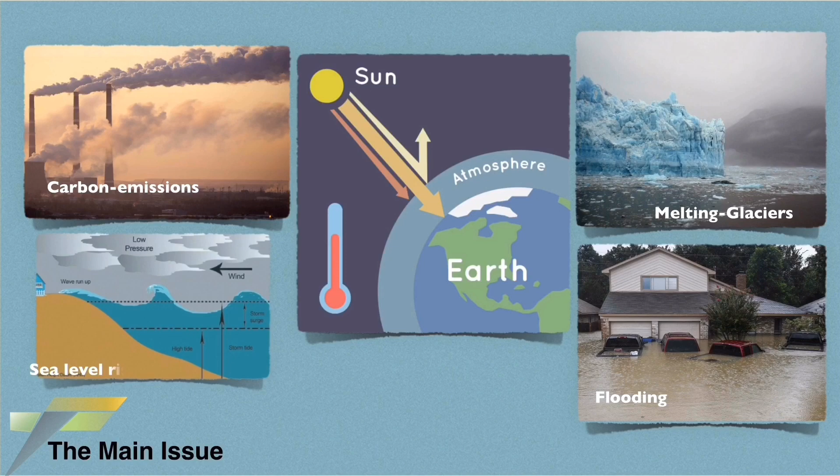Today, a challenge facing the world is happening much faster than ever before due to increasing carbon emissions and rising global average temperature, leading to melting glaciers, more flooding and rising water level. By 2050, the most low-lying coastal cities will face a projected sea level rise by at least half a meter. This puts millions of people at risk from impacts of rising seas.

These challenges have forced architecture to shift from land into water, creating a sustainable future vision by improving floating building systems. The following presents the main principles for constructing a floating building: mega float pontoon type floating.

A huge plate placed on the sea level. The pontoon uses concrete composite with expanded polystyrene lightweight material. The access bridge, the chain mooring piles for more stability and fixed due to fluctuation of the water level, mooring facility to maintain the floating structure in place. The breakwater for mitigating wave forces affecting the floating structure.

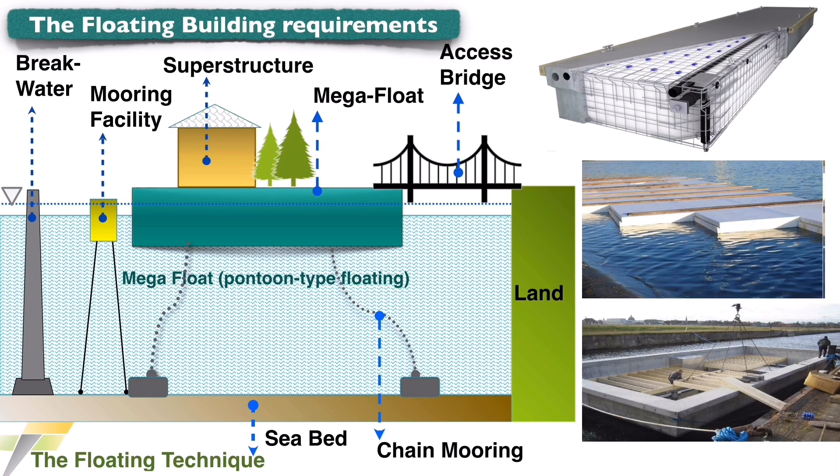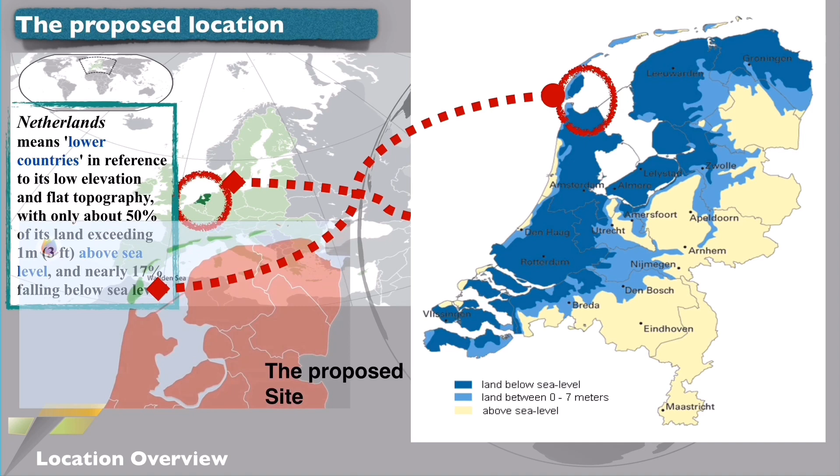The proposed location for building a floating resort is Netherlands. Netherlands is located in northwest Europe, along the North Sea. Netherlands in Dutch literally means the low country. Most of the land is reclaimed and coastal lowland.

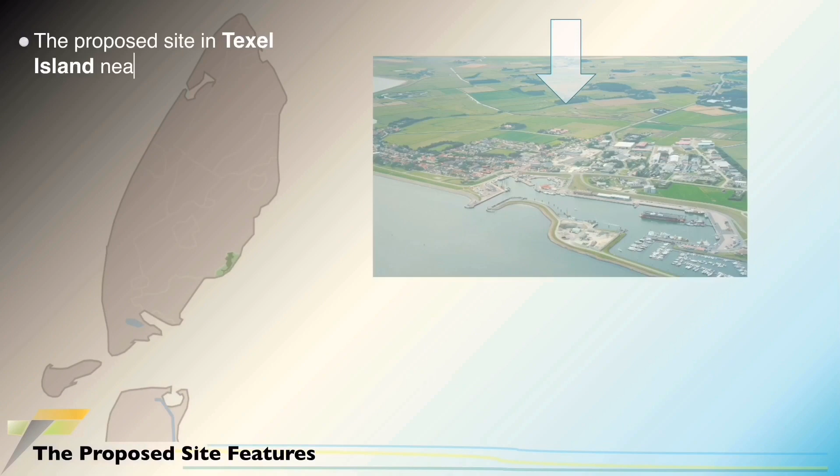The Texel Island, which is the selected site of the floating resort, is one of the largest island groups along the Wadden Sea Islands in the north of the Netherlands. It's located in the north-northwest of the Netherlands, about 12 km north of Den Helder, along Oudeschild town. The proposed site is connected to the main roads and neighborhood facilities in Oudeschild town.

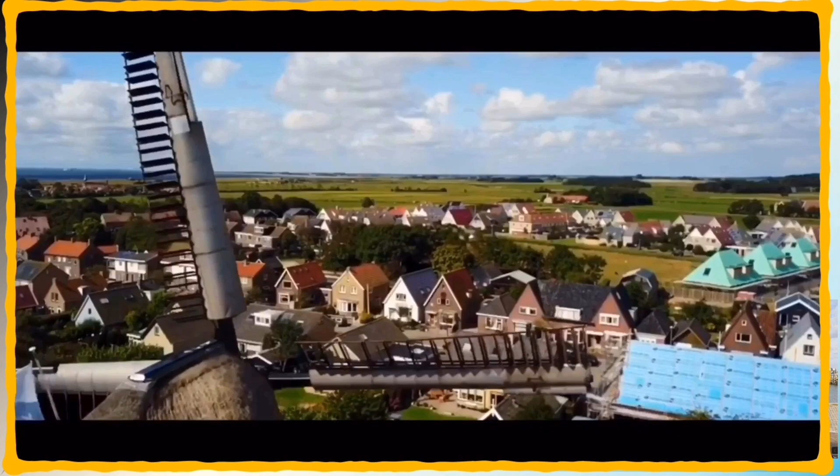Texel Island has an extensive network of cycle paths. It's common for seals, sandy beach, dunes, and grass-topped areas, near to the fishing harbor. Texel Island has a wealth of natural and cultural landscape.

The weather conditions of Texel Island are most impacted by the Wadden Sea and the North Sea surrounding it. The following analysis best describes the climatic conditions. The sun path will be from the northeast side of the building to the southwest, while the dominant blowing wind direction is from the southwest, a cold wind.

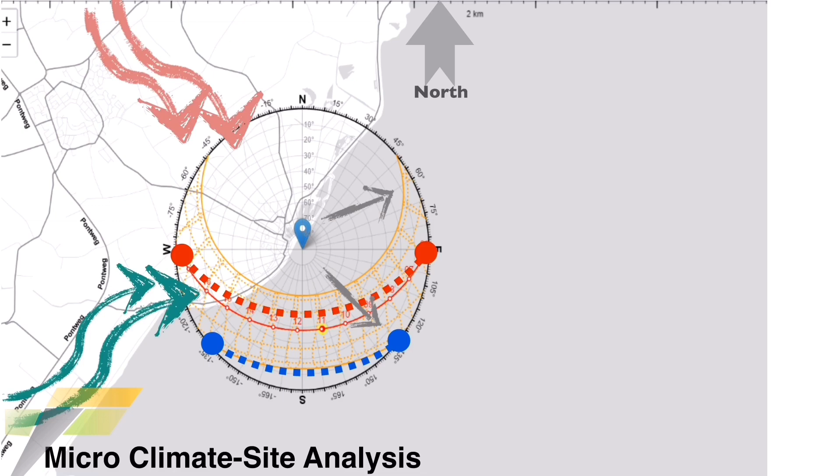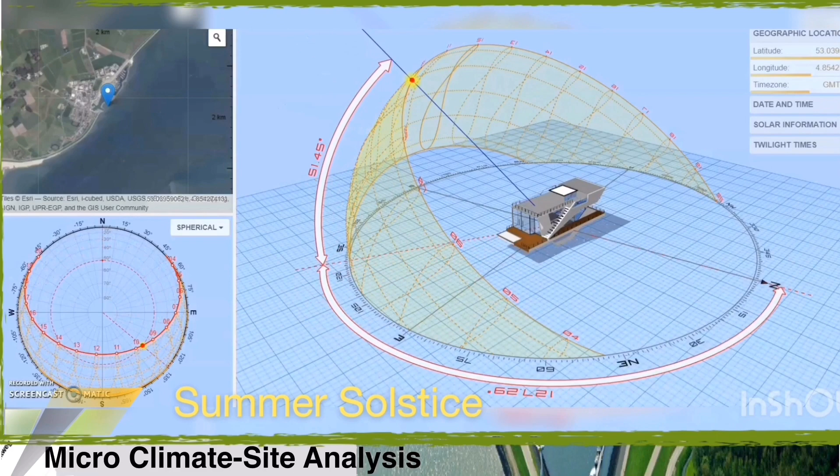The proposed site is an open location, exposed to the wind and tide, which can be beneficial for employing renewable energy sources. We can clearly notice the sun angle during summer and winter solstice. The sun path of the building runs between sunrise and sunset, with a very low solar radiation angle during winter solstice.

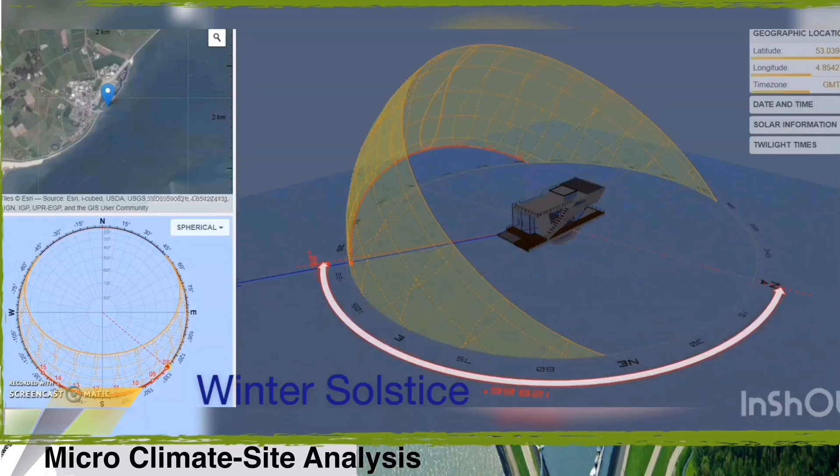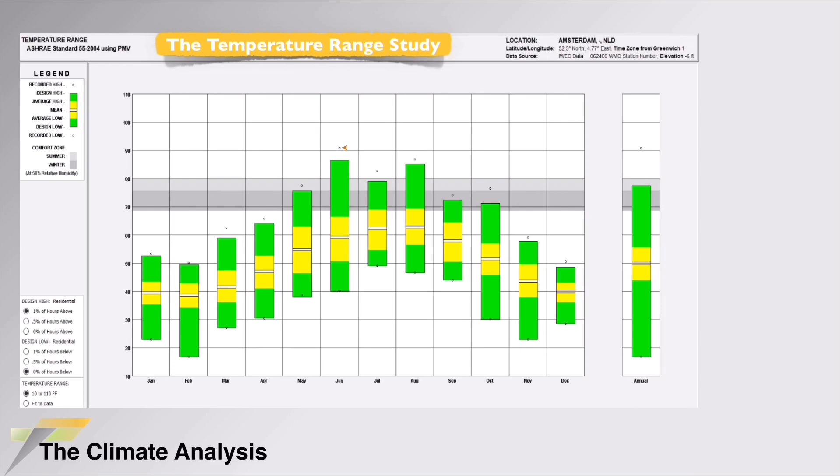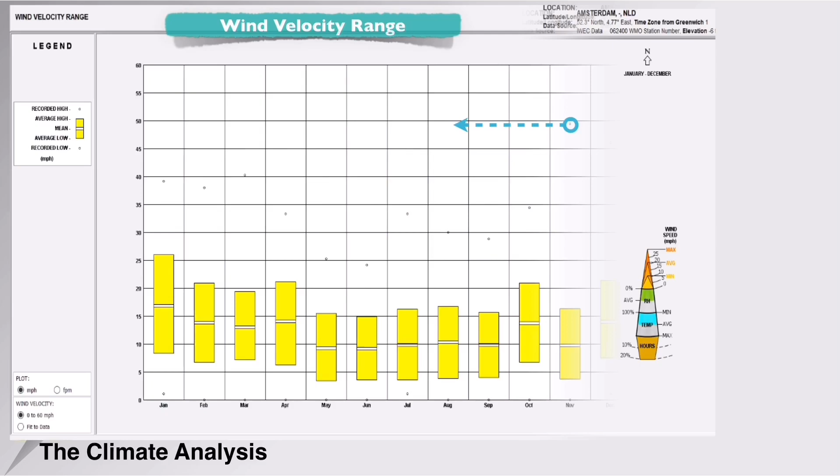The highest recorded temperature, in June, is about 88 degrees Fahrenheit, while the lowest temperature, in February, is about 18 degrees Fahrenheit. The most prevailing and strongest wind is from the southwest direction, with about 50 miles per hour recorded as the highest value in November.

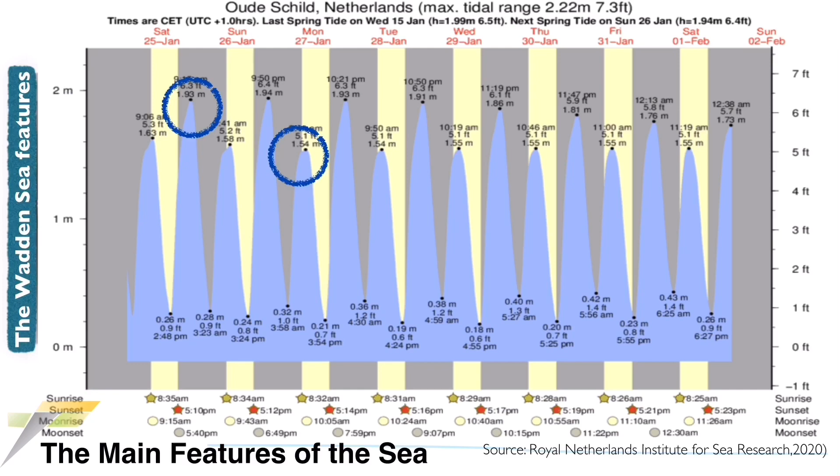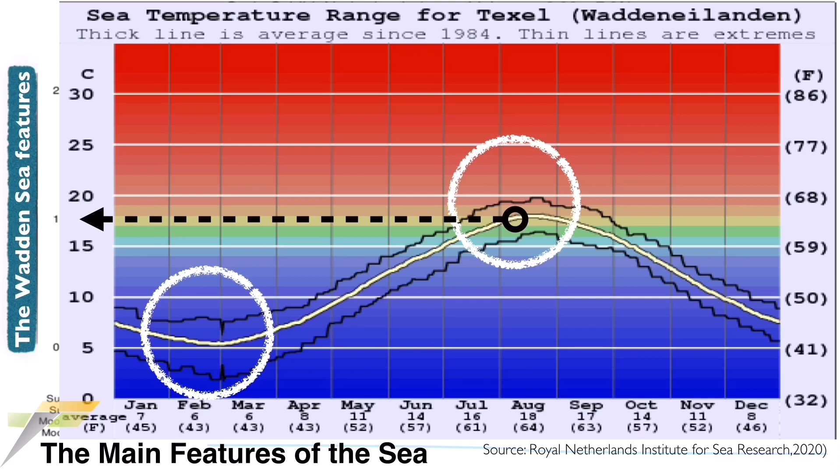Maximum tidal range is about 2.22 meters, while the lowest tide height is about 1.5 meters. The water temperature of the Wadden Sea peaks around 18 degrees Celsius in August, while the minimum temperature is about 2 degrees Celsius in February. The water depth along the coastal Wadden Sea is about 2 to 25 meters.

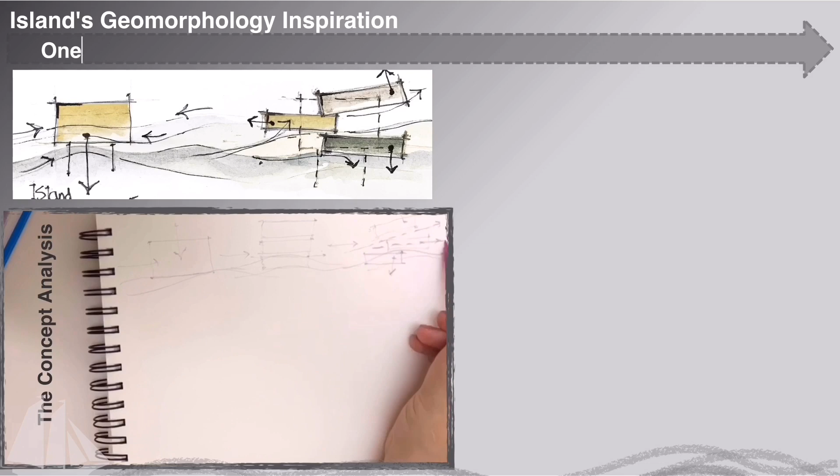Texel Island's geomorphology is an endless source of inspiration for me. The dune floating resort is not only sitting on the water, but it also responds to the surrounding environment.

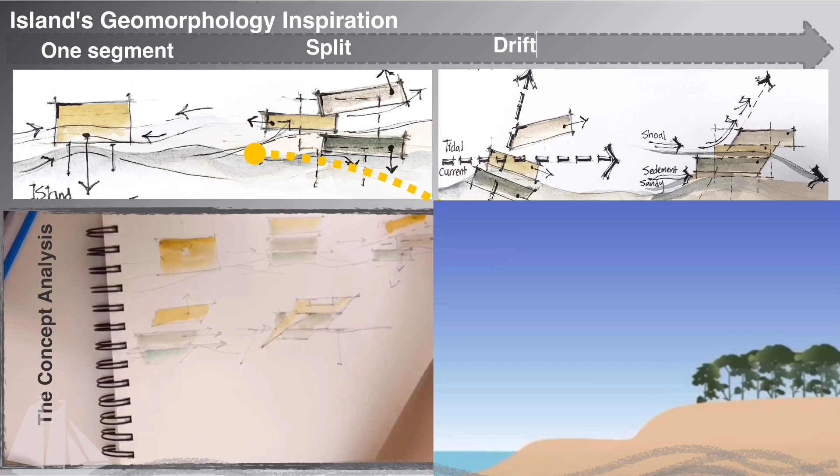Divided into 4 stages: the island segment is exposed to natural power sources, resulting in losing its stability, then splitting into 3 different layers. A drift grows in displacement as the tidal current rises, and finally dune sediment accumulation creates the final form.

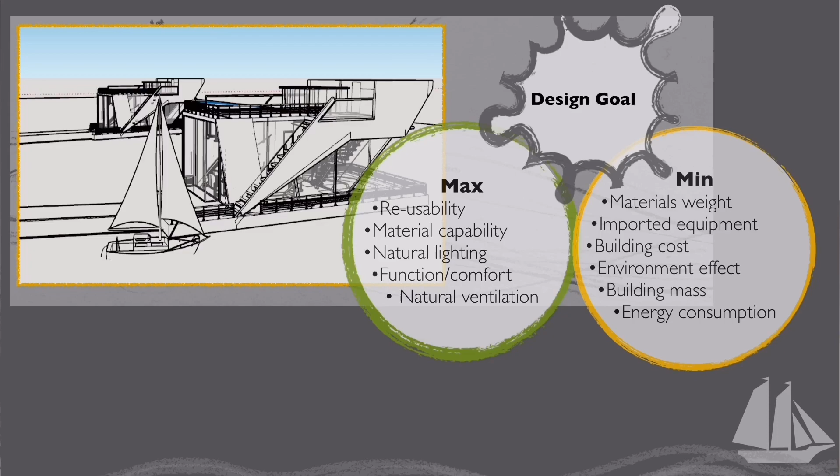The design of the project attempted to achieve these goals. The floating building includes 3 different levels: the ground floor, the first floor, and the observation room underwater. There is a variety of differential levels within the space.

This motivates the guest to explore more, as well as keeps flowing circulation by altering access from one zone to another. The ground floor includes the main spaces: lobby, living room, dining, and kitchen.

The living room is surrounded by a large glass wall connected with open space for enhancing visual daylight, and a mesh deck for relaxing. The swimming pool opens to a wide view of the sea. The first floor is elevated by a light stair to the bedrooms.

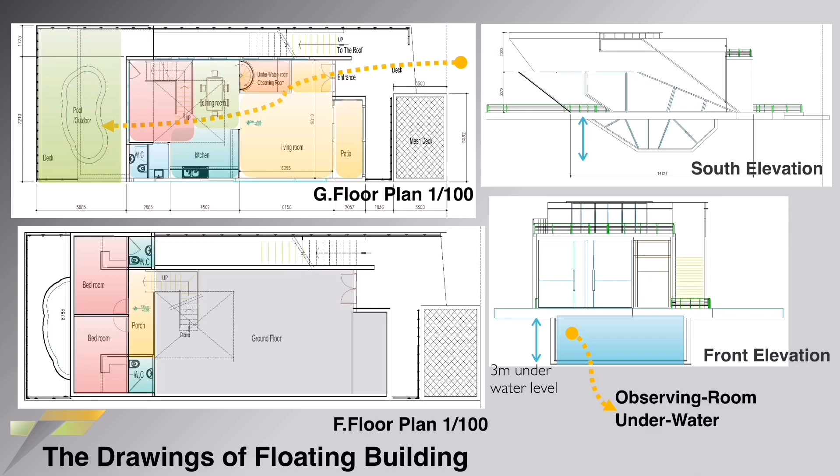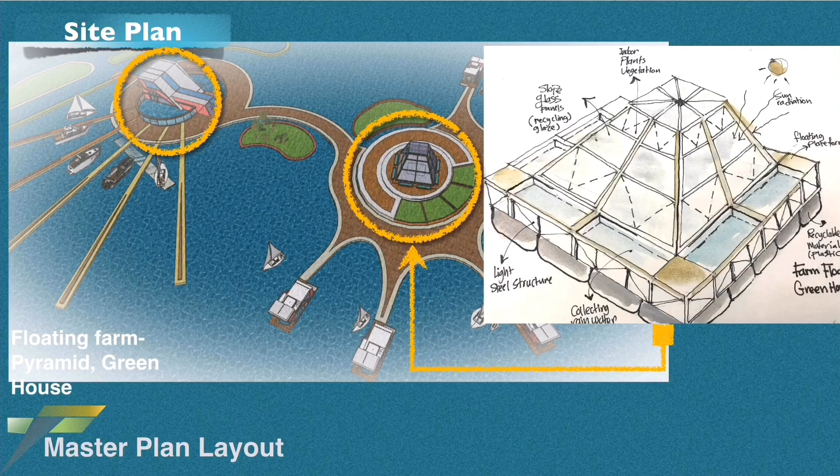As you step into the project of 6 units of floating buildings, you enter the main building, which represents the entrance of the project, gently stretching to the floating farm by a curved jetty, with 6 units distributed in a radial rounded form.

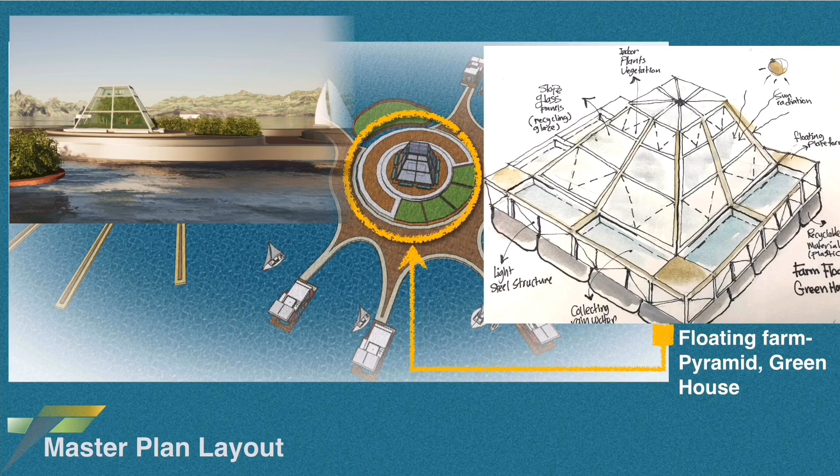The floating farm, filled with herbs and flowers, acts as a greenhouse, collecting the rain water through a glazing surface slope into basins.

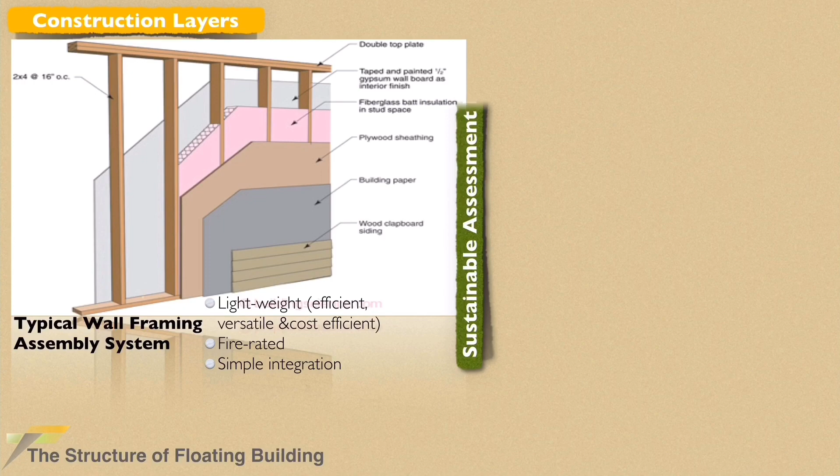The total weight of the structure and the environmental conditions surrounding the structure are the main parameters targeted for designing an appropriate structure for a floating building. The construction wall of a floating building has different layers of suitable materials associated with a floating house target in Netherlands. It should be lightweight structure, ecosystem-friendly, fire-rated, simple to integrate, and fit with the environment.

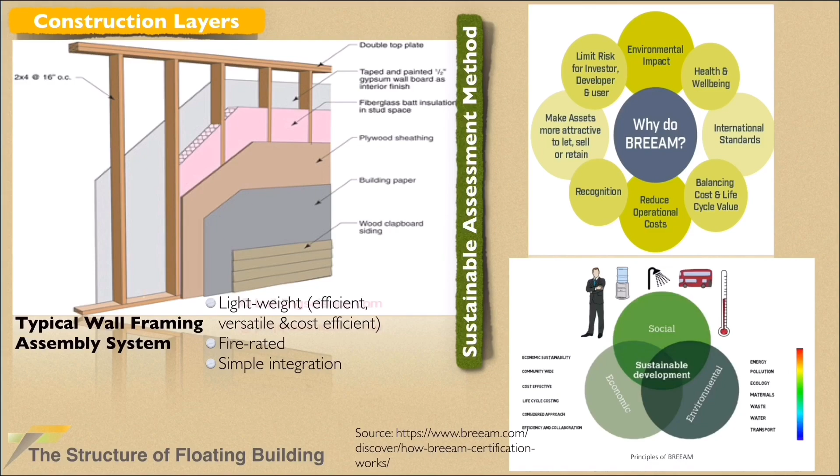The building project complied with BREEAM as a sustainable assessment method to assess building performance based on environmental, social, and economic sustainable impact through setting standards for best practice.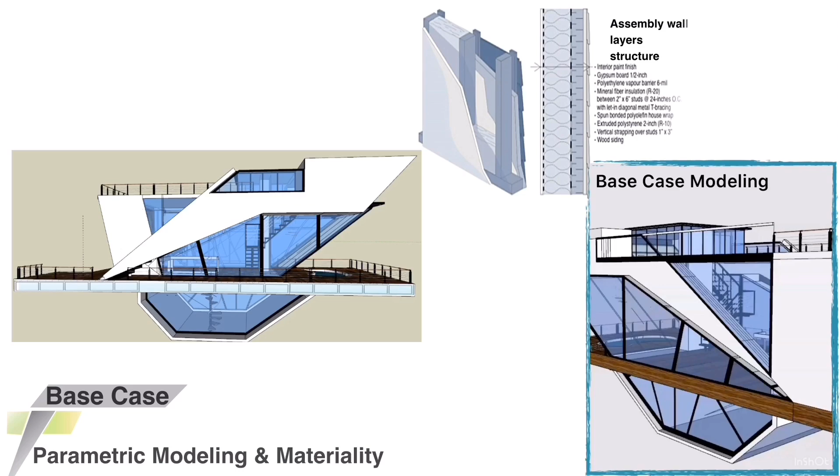This section will present the modeling design for the base case and the 3 proposed skin strategies with their selected material cladding. All materials of the floating building are associated with the Netherlands Building Code.

The base case construction can be described as shown in the figure. It is covered by aluminum composite panel, opaque panels, silver powder coated, connected together piece by piece as large cladding materials, with large segments of double glazing.

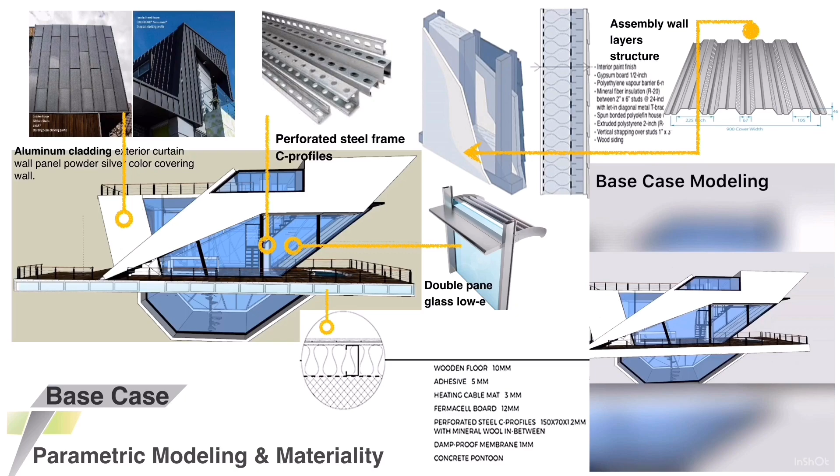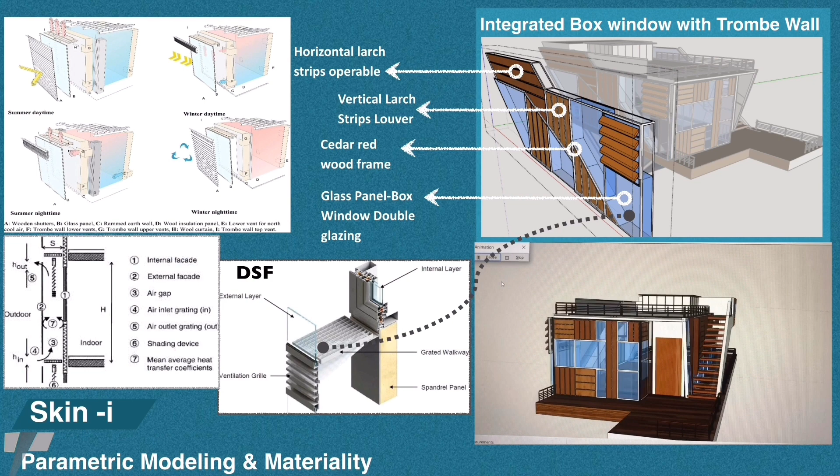The first skin strategy is designed for enhancing energy performance. The envelope design is divided into different segments: a transparent surface of double skin facade and an opaque surface of vertical and horizontal cedar red western larch wood strips, which are adequate for cladding. The glazing surface acts as a box window, consisting of a cavity space between 2 glazing surfaces with a bottom air inlet flap.

The second skin strategy creates a double skin facade by applying outer and inner glazing surfaces using ethylene tetrafluoroethylene (ETFE) film material cushions, which have 2 layers filled with air, lying behind the glass fiber reinforced polymer rib structure.

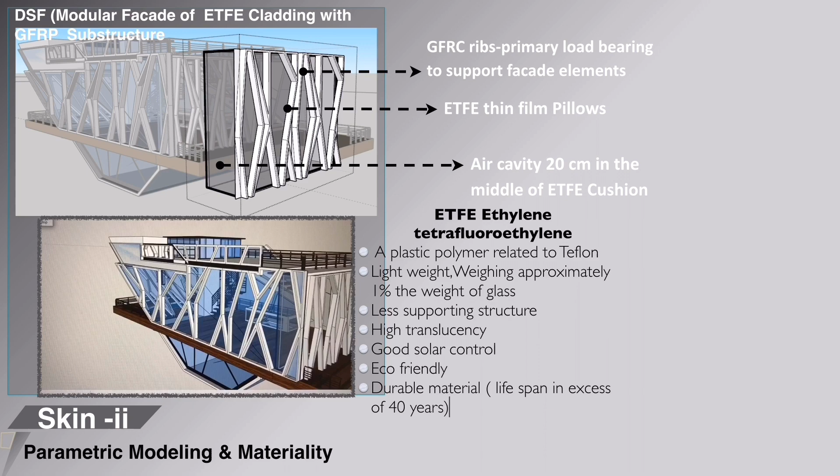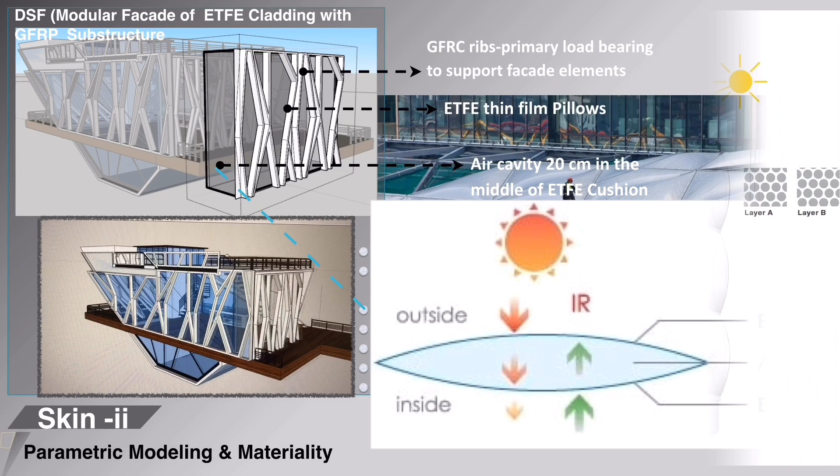Different physical properties of ETFE can improve the performance of building envelope, such as lightweight of material. The double layer cushion is about 1% of common glass, which requires lower support structure. The high thermal mass improves insulation properties by achieving conductivity of 2.6 watt per meter square Kelvin, with high transparency.

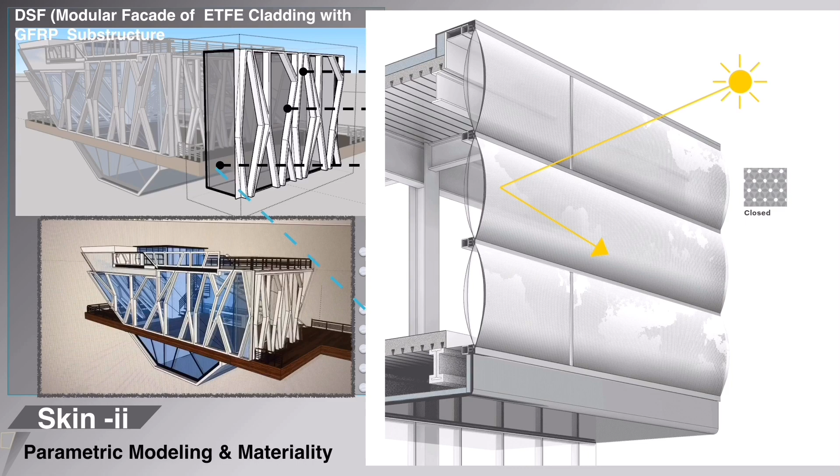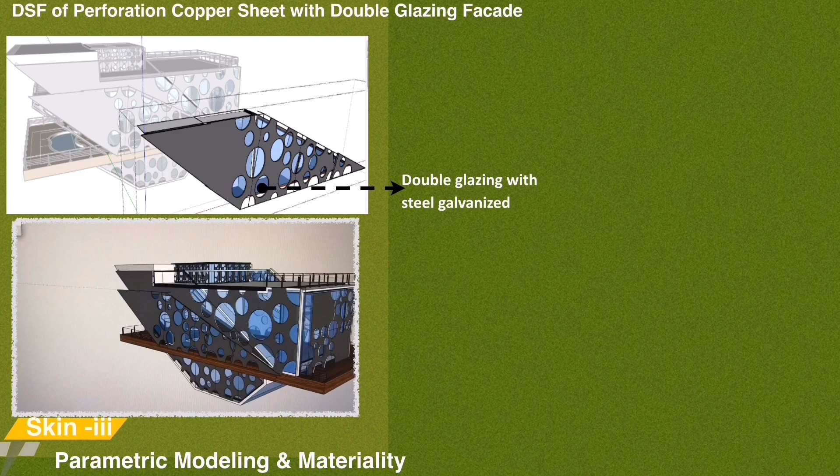The third proposed skin strategy is a double skin facade of perforated metal panels, based on significant architectural design, for enhancing the energy performance of the building. The external round hollow perforation layer is made of copper alloy covered by anodized PVDF powder coating. It can achieve different levels of transparency, and inspires architects to create new visions and innovative applications.

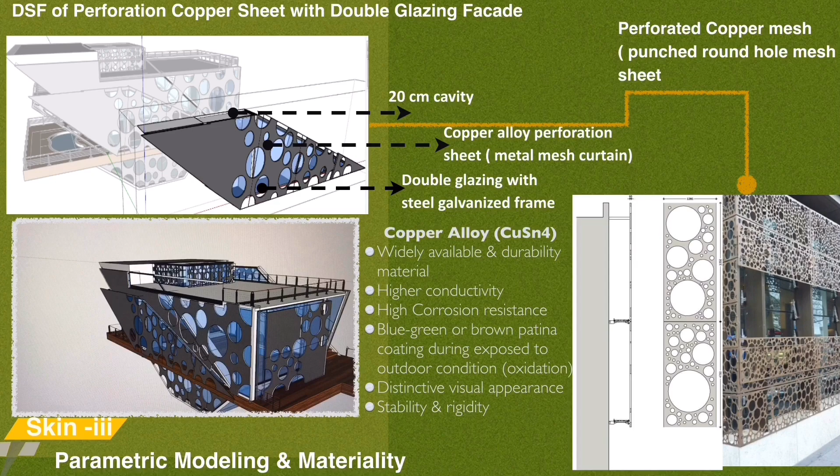This section will show the daylighting analysis for all strategies by using the IES tool for measuring the radiance, luminance, and glare resolution under overcast sky condition on March 21.

The average illuminance of the base case is 1984 lux with a 0.5 uniformity ratio. We can clearly see higher glare resolution near the side of the glazing facade.

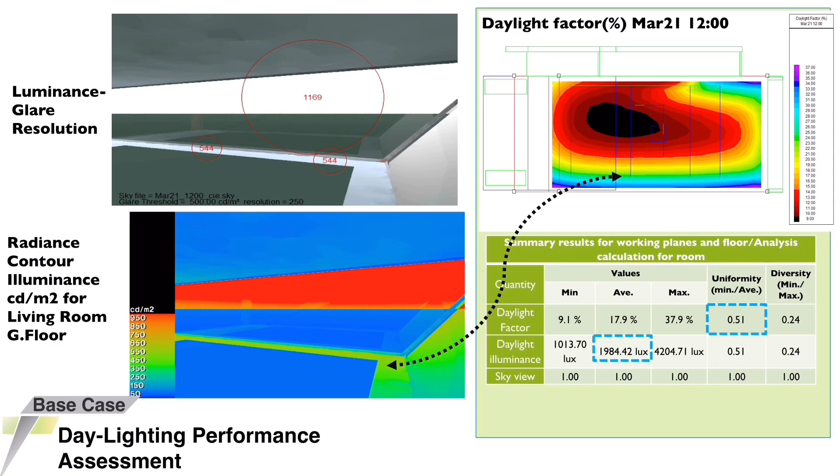The measured illuminance values of Skin 1 are better than the base case value. The uniformity ratio is lower than the base case, about 0.15, while the average daylight factor in luminance reaches 616 lux.

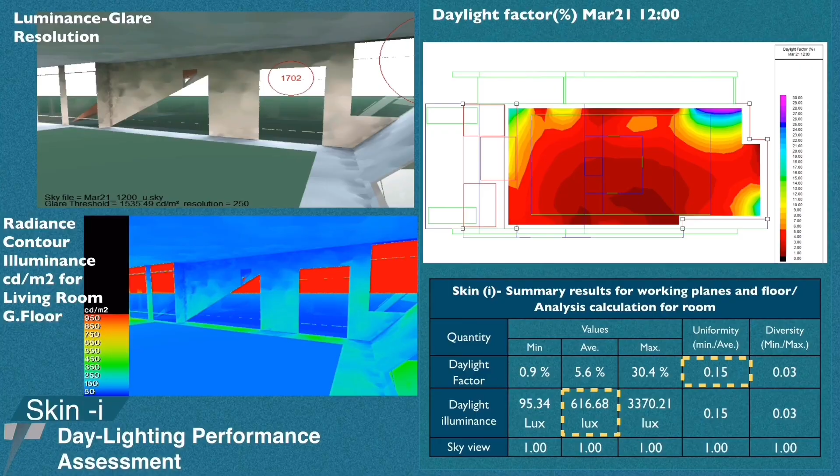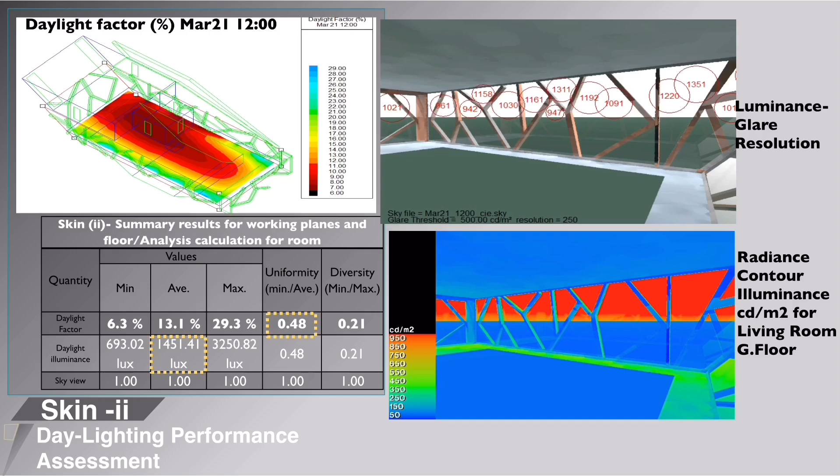Daylight distribution contour lines are remarkably noted next to the ribs facade in the strategy design of Skin 2. The high transmittance material of ETFE allows higher daylight penetration in the zone. The average illuminance is 1451 lux, while the uniformity ratio is lower than the base case, about 0.48.

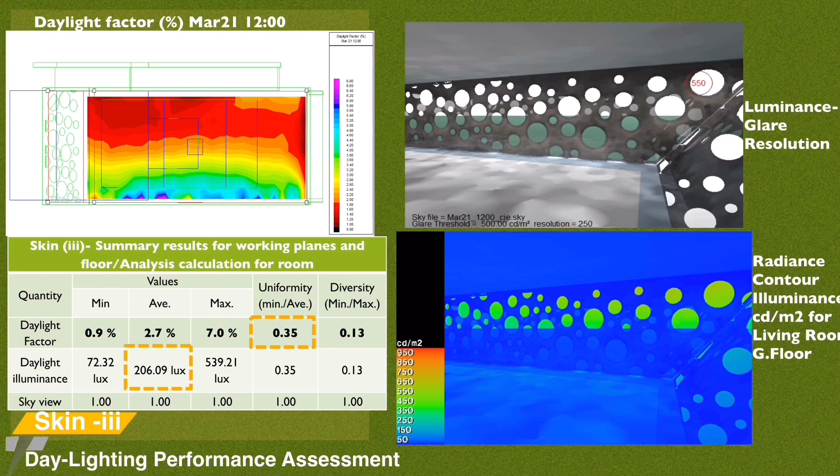Here is Skin 3, which demonstrates the most acceptable daylighting performance through adequate distribution of natural lighting in the room, with deeper lighting across the area to achieve adequate illuminance. The average reaches 206 lux with a 0.35 uniformity ratio.

This section will analyze the annual energy performance of all strategies by using Integrated Environmental Solutions Apache.

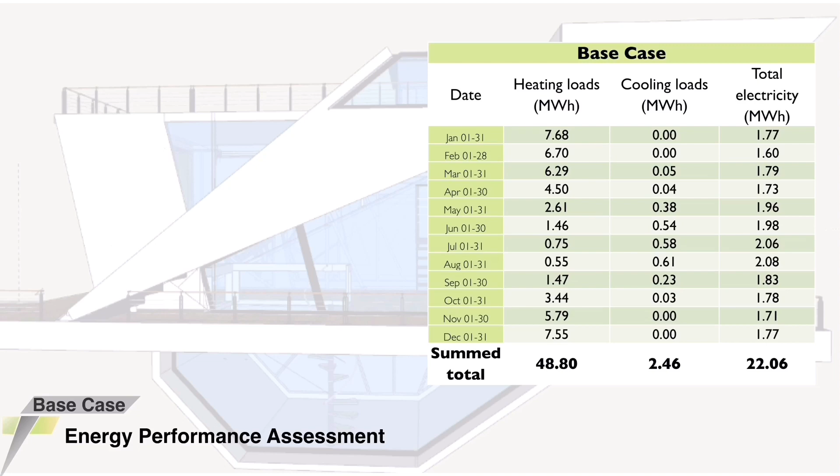The total annual heating load of the base case is about 48 MWh, with the highest values recorded during December and January. The total annual cooling load is about 2.46 MWh, with August achieving the highest value. The total annual electricity is about 22 MWh, and the reading prediction indicates a trend of higher consumption.

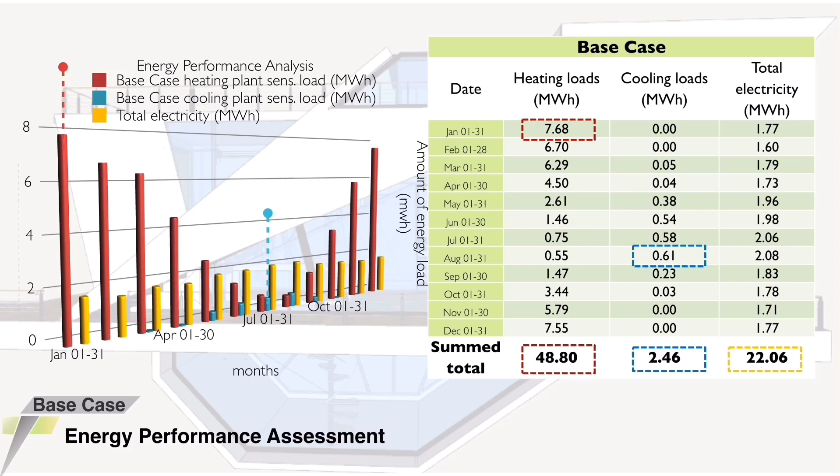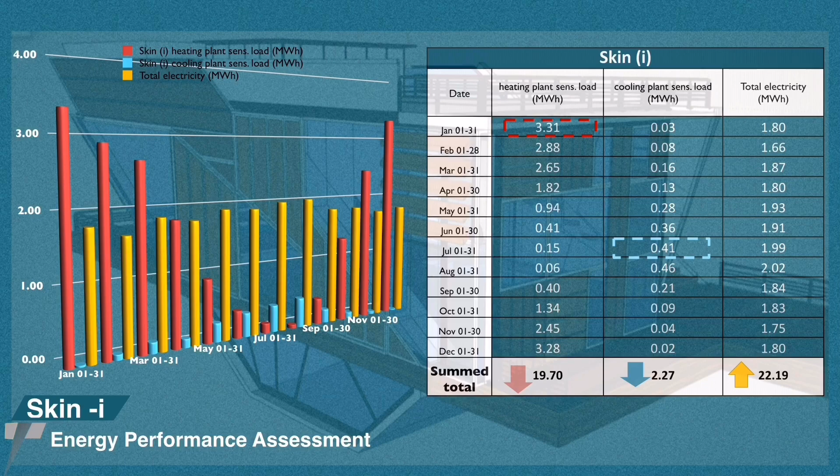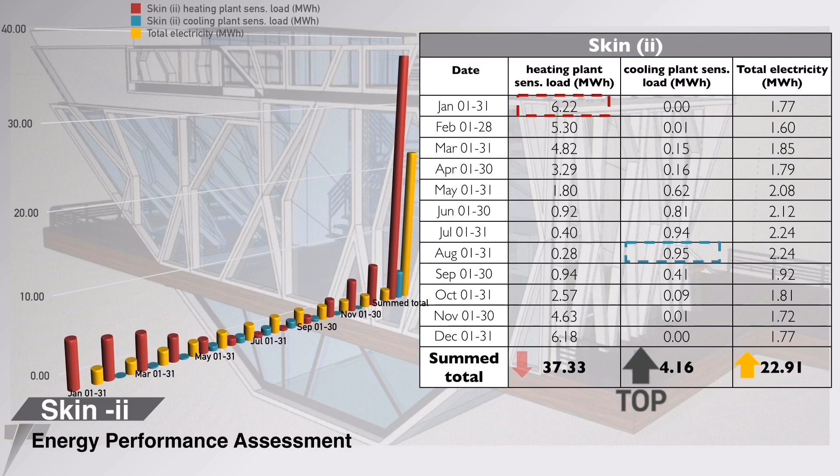The design envelope of Skin 2 improved the reduction value of heating loads to reach 37 MWh, but it failed in decreasing the annual cooling loads compared with the base case, recorded at about 4 MWh. Skin 2 acts similarly to Skin 1 regarding total electricity, which is still higher than the base case, recorded at 22.91 MWh.

The third Skin achieved remarkable reduction in energy performance. The total annual heating load reduced to reach 22.7 MWh, while the annual cooling achieved the lowest value compared with other strategies, resulting in 0.8 MWh. Skin 3 achieved the most efficient reduction in total electricity, dropping to 18.68 MWh compared with the others.

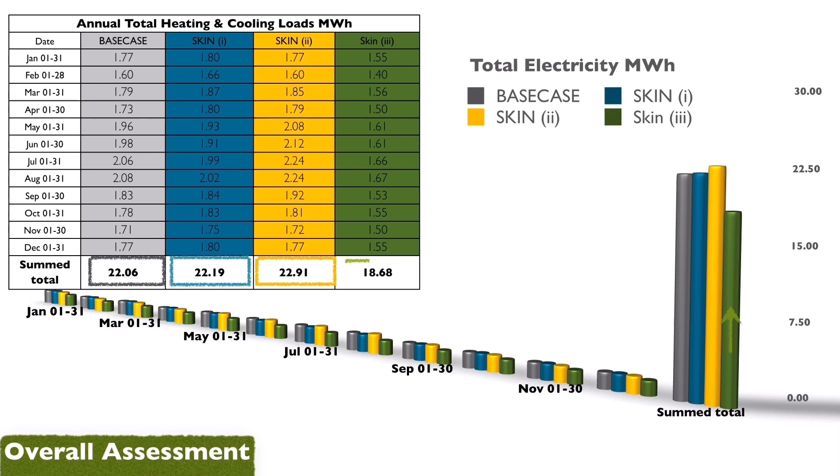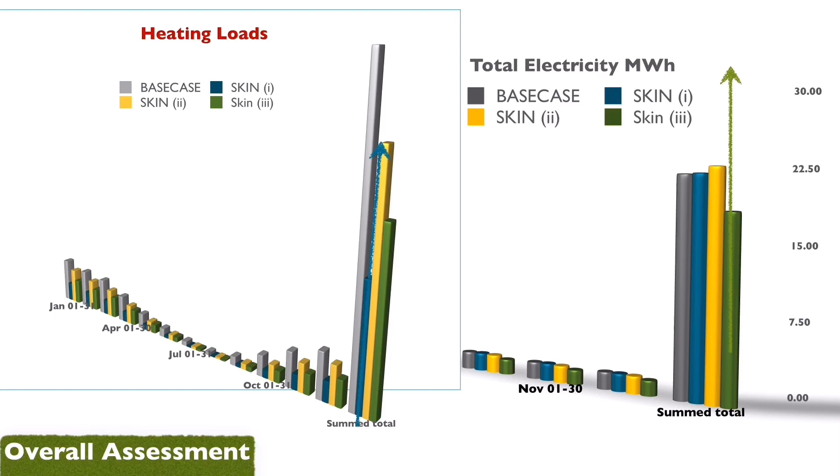This section presents evaluation among the proposed 3 skin strategies compared with the base case. According to total electricity, Skin 2 is the highest value, followed by Skin 1, then the base case, while Skin 3 achieved the highest reduction of total electricity relative to total annual heating loads. Skin 1 achieved the lowest reduction value compared with the other strategies. In terms of total annual cooling loads, Skin 3 achieved the lowest reduction value compared with other strategies.

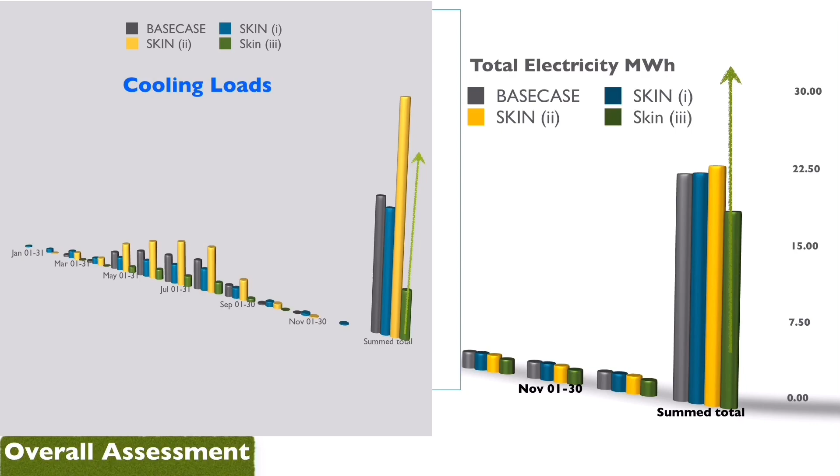The last Skin strategy represents the most efficient skin design of the building envelope compared with others in terms of energy performance. This portion will install 3 proposed PVs on the optimal model, covering 40 meters square on the first floor roof. After installing the PVs with the Skin 3 design, it is clear that all types of PVs reduce the total energy consumption load, and the last type, monocrystalline silicon, achieved the best performance by reducing the total energy to 14.3 MWh.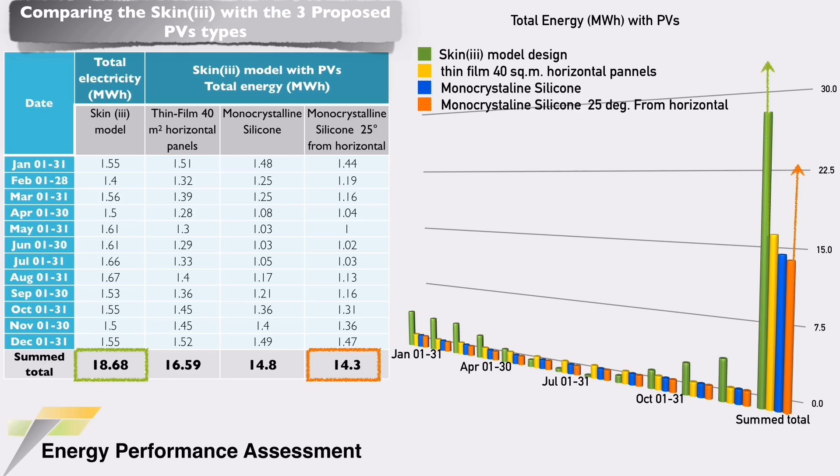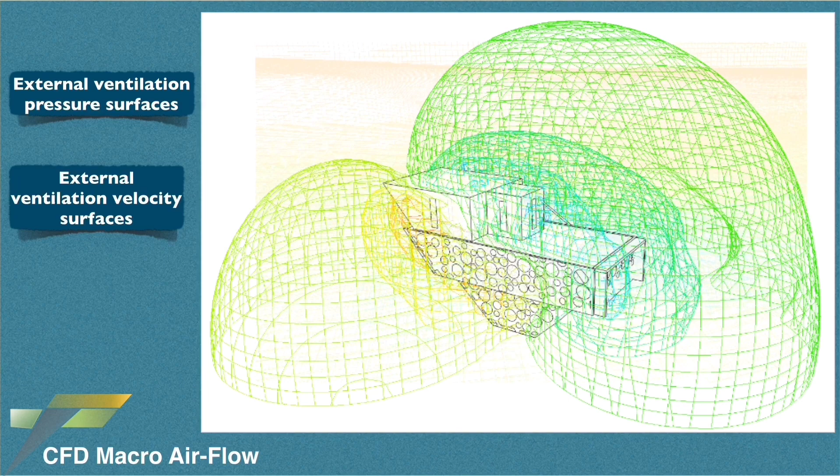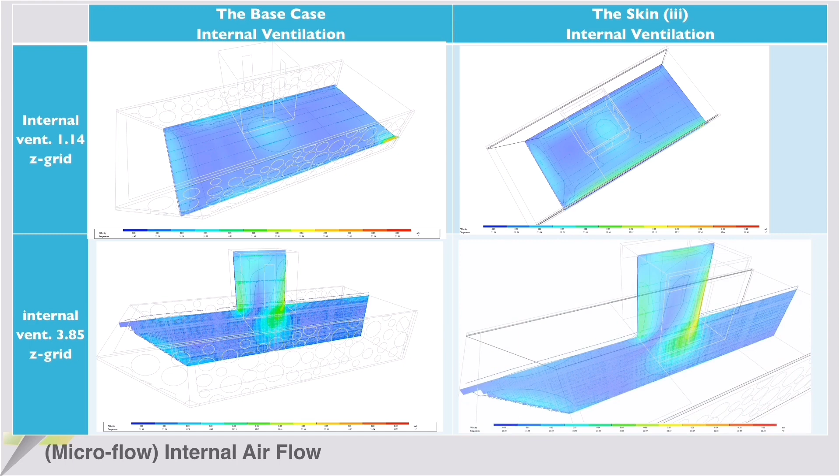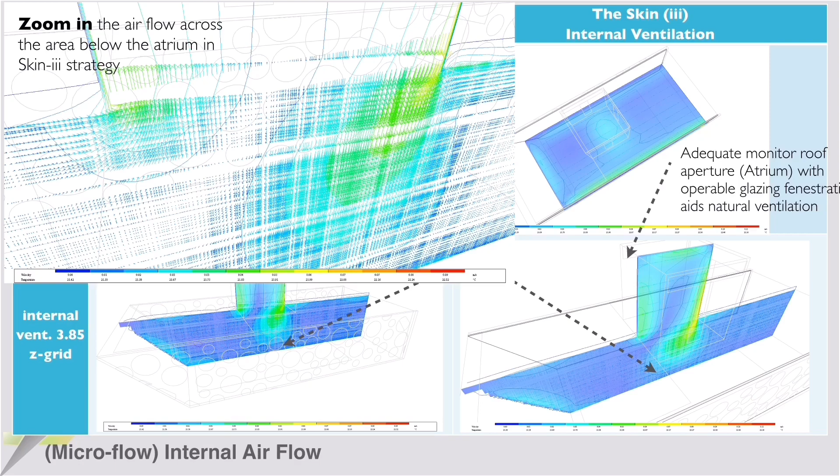Mostly the prevalent wind pressure from the southwest passes across the building. The following compares the internal ventilation of the base case with the optimal Skin strategy. The optimal Skin created a passive ventilation system for enhancing airflow across the area, clearly showing higher air circulation distribution than the base case along the side wall and below the monitor, while higher quality air ventilation levels help maintain a comfortable environment and reduce overcooling loads during summertime.

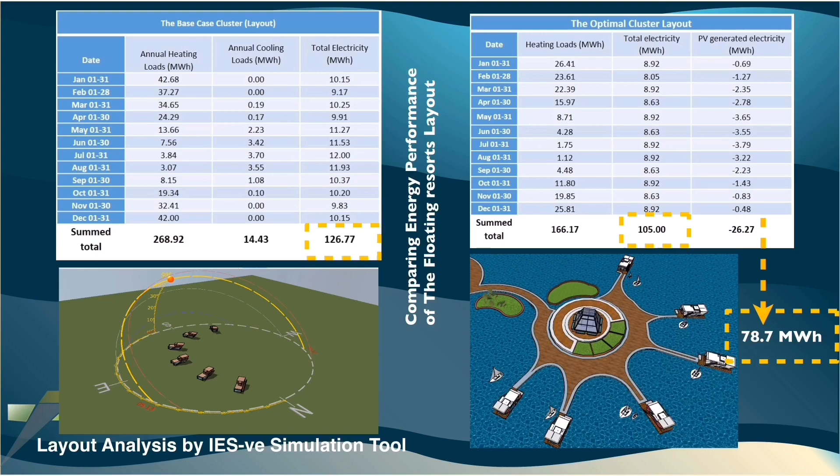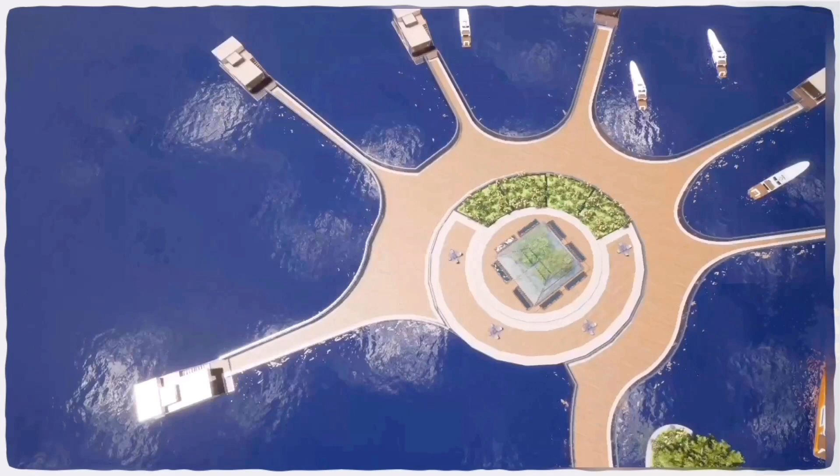This section compares the base case cluster of all 6 units with the optimal skin strategy applied to the whole 6 units in terms of energy consumption. The total electricity for the base case is 126.7 megawatt hours, while the optimal cluster layout reduces the total electricity to reach 105 megawatt hours. Higher reduction is achieved by installing passive ventilation and integrating PVs, reducing total electricity to reach 78 megawatt hours.